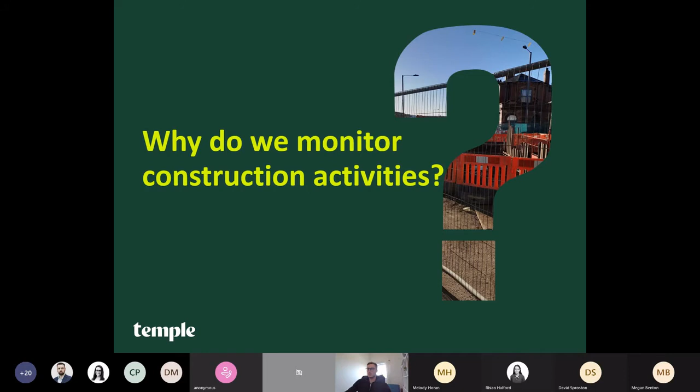So we can just flick to the next slide please. So, question: why do we monitor construction activities? Okay, so these are the topics for discussion today. I think this slide gives you a bit of a clue to the answer to that question. We're going to run through these key topics in the next 10 minutes or so, and hopefully by the end of the slides we'll be able to summarise the value and importance of environmental monitoring.

Okay, so the first key point I want to address is legislation. Environmental monitoring is often a legal obligation. That may be, for example, under an overarching legislation, such as the Control of Pollution Act, which requires us to manage noise effectively on construction projects. This act usually dictates the use of best practice, which is often in the field of noise controlled through a Section 61 consent. So environmental monitoring ensures compliance with such legislation and the regulations and permits which may sit underneath this.

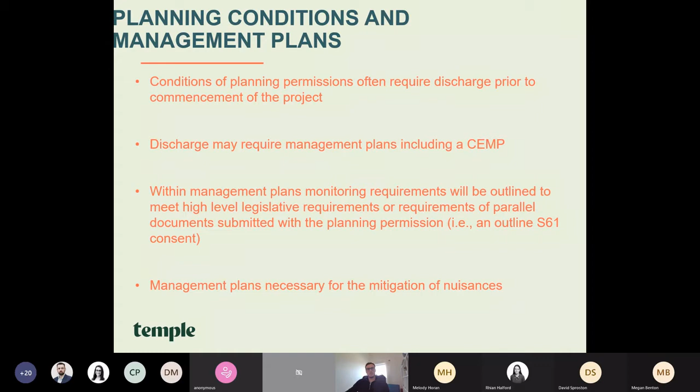But if a pollution incident does occur, the Environment Agency may fine an individual or a company. Now, these fines reflect the seriousness of the offence and the financial circumstances of the offender. So there's no blanket fine for, say, a set offence. As stated, it's linked to company turnover, harm, or culpability. Now, these fines can vary from hundreds of pounds to hundreds of thousands of pounds fines in very extreme cases.

So just to run through a couple of examples with you on the financial implications that may come from enforcement action. A company was recently fined £6,000 and ordered to pay over £4,000 in legal costs, after pleading guilty to breaching environmental permitting regulations. In this instance, that was for causing trade effluent to enter freshwaters without being authorised by the environmental permit that's required.

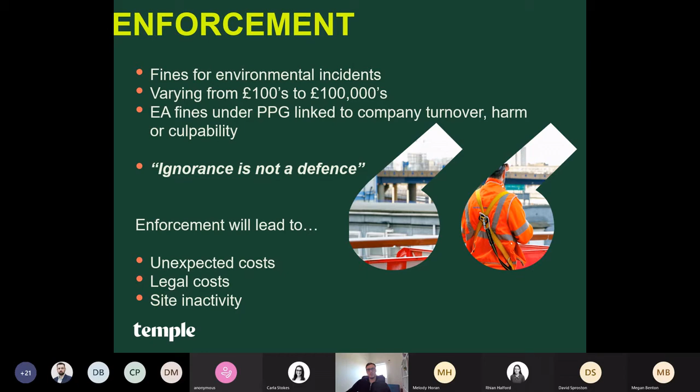An example of an indirect financial penalty linked to site inactivity is a road project in central London several years ago. They continually breached their Section 61 consent under the Control of Pollution Act, which relates to controls on noise and vibration. The council provided warning letters that weren't abided by, and subsequently placed a Section 60 notice on the project. This limited the working hours from 8 hours a day to just 45 minutes per day for the piling activity responsible for those noise breaches. Clearly, this has a significant impact on programme and subsequently costs. So environmental monitoring is a vital part of avoiding that enforcement action.

Aside from simply avoiding enforcement action, environmental monitoring may be required under certain contractual agreements with a client due to, for example, stakeholder agreements or client minimum environmental standards in line with an accreditation such as ISO. For example, ISO 14001 requires evidence of continual improvement, for which environmental monitoring provides that data set and evidence. Sometimes a client in an urban environment may also require monitoring of activities due to the sensitivity and proximity of nearby receptors, in order to manage the risk of nuisance, potential complaints, and reputational damage which may subsequently follow.

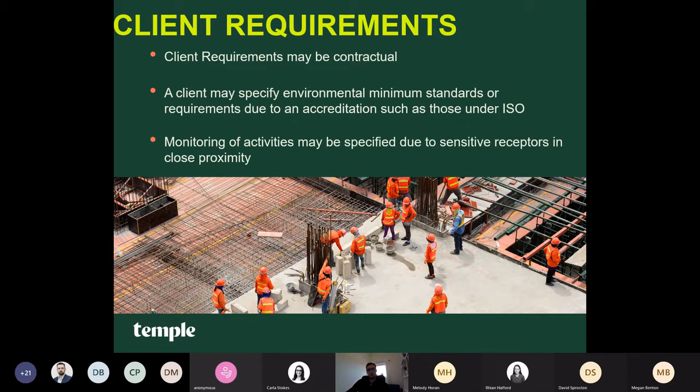As we've just alluded to, environmental monitoring may be required to manage nuisance associated with construction if receptors are in close proximity or a sensitive location, for example, downwind of the site. As you're aware, plant on construction sites can cause health issues to those nearby, be that through noise or air pollution, if steps are not taken to mitigate the risks. Environmental monitoring allows us to predict through the collection of data where issues are arising, and allows us to put in place mitigation measures to protect the community before the issues get out of hand.

A good example of this would be a particularly dusty activity, such as a certain material being cut, taking place outside in the open on site. Without environmental monitoring, the activity may continue for several days, weeks, or even months, allowing complaints to build up and potentially, as a worst case scenario, long-term health issues for sensitive local receptors. However, with environmental monitoring, a real-time alert goes off as soon as the activity breaches the trigger level, and the activity can be instantly shut down whilst a mitigation measure, for example, something as simple as moving that activity indoors, can be established. So, due to early warning, this would mean no complaints and no harm to local receptors.

Another point to make is that environmental monitoring allows a method to manage complaints. With that background data we can collate, we can easily establish if a complaint is accurate or technically justified, and this is a useful tool to take to stakeholder forums.

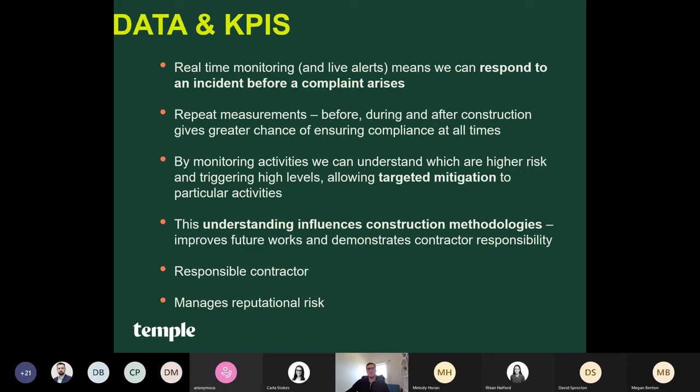However, it's not just about managing reputational risk. Environmental monitoring can also be seen as an opportunity. Environmental monitoring, demonstrating that environmental stewardship, can actually boost future opportunities and tender bids. This can especially be the case if the contractor uses examples of going above and beyond to attain environmental awards, and in order to do that, monitoring data will be crucial in providing evidence. An example will be the Green Apple International Awards, which aim to encourage the efficient use of resources, enhance the competitiveness of organisations, and support the wider goals of sustainable development.

So to spin back to the original question, why do we monitor construction activities? I think this slide summarises 4 key points. Monitoring aids in remaining compliant with control measures required to carry out the project, managing and mitigating against potential nuisances, pushing continual improvement with those repeat measurements over time and that bank of data we can collate, and ultimately demonstrating environmental stewardship.

I think most importantly, environmental monitoring allows construction sites to help maintain good relationships with their neighbours, which ultimately benefits contractors in their aim of being awarded future works.

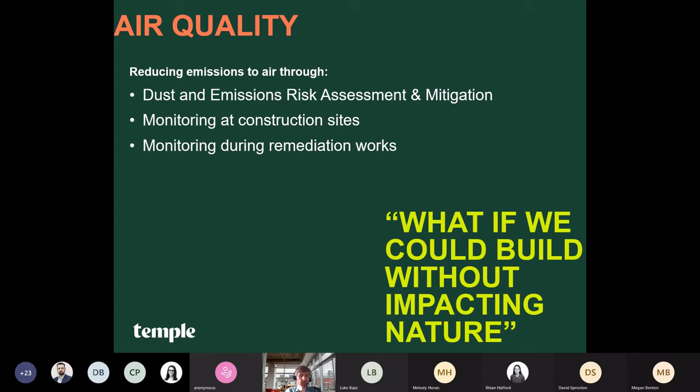Next slide, please. So the requirement for mitigation and monitoring at construction sites is often determined within an air quality assessment that might be submitted with a planning application, or in order to discharge a planning condition, you might have to produce something like a dust and air quality management plan or relevant sections of a CEMP, which Luke was referring to.

So air quality assessments or a dust and air quality management plan will typically include a dust risk assessment, with the risk category used to determine proportionate mitigation measures and then inform the monitoring strategy.

While the Mayor of London has published guidance applicable to the Greater London area in 2014, most other local authorities across the country haven't adopted their own guidance, and so dust assessments, mitigation measures and monitoring requirements are typically recommended in accordance with equivalent guidance documents issued by the Institute of Air Quality Management.

The guidance recommends a suite of mitigation measures, and these can cover things from covering and seeding stockpiles to stop dust being generated in the first place, through to steps which management should take to enforce mitigation measures, but I haven't gone into too much detail about this in this presentation.

It should be noted that monitoring is typically required to monitor emissions from general construction activities, but mitigation of emissions from plant and vehicles can also be recommended.

So, for example, in London, and other local authority areas, including Warwick, you might have to implement requirements on non-road mobile machinery to make sure that they meet prevailing legislation on emission standards, and these can vary in London in different sorts of places.

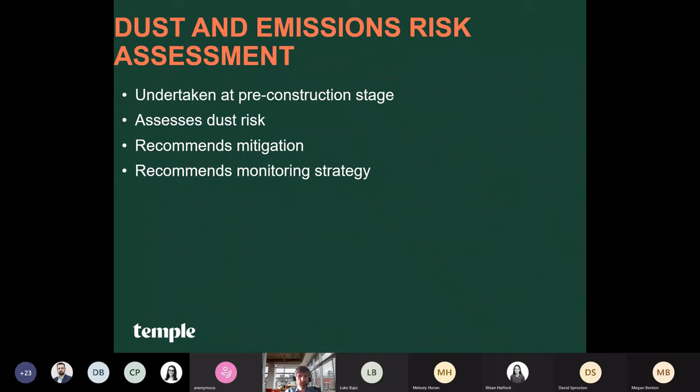Next slide, please. So monitoring should be undertaken to confirm measures to control dust and particulate matter, or PM10, generated at construction sites is sufficient, and shouldn't be used to replace mitigation measures.

The consensus for a low-risk site following assessment in the IAQM guidance is that visual inspections are sufficient, but continuous monitoring, whether using reference or indicative measures, is recommended in guidance at medium and high-risk sites in London, and at least high-risk sites in assessments where the IAQM guidance applied.

The London guidance recommends that monitors should be located either along transects, so that you can compare upwind and downwind concentrations, or near sensitive receptors such as local residences. Ideally, these would be relocated as work progresses, for example between different phases of a development as it progresses.

So while reference method monitors are available to give precise measured pollutant concentrations, a new monitor can cost upwards of £10,000, and the main purpose of monitoring at a construction site is often to identify when dust from site activities or stockpiles is causing an impact above the baseline, so that you know you then need mitigation.

So indicative instruments often have acceptable precision to show the trends in PM10 concentrations over time, and therefore they're suitable for this sort of purpose.

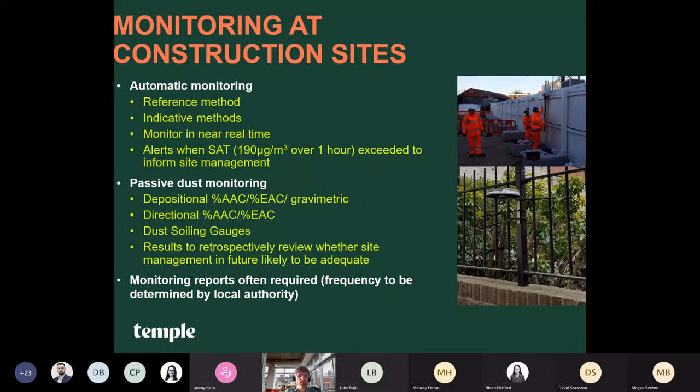At some sites, such as a house builder's residential site we're currently working on in Plumstead, you might want to monitor for contaminants that might be exposed in contaminated soil as earthworks commence. Where a site is found to be contaminated, a geoenvironmental consultant will often prepare a remediation method statement, which might recommend precautionary air quality monitoring at the site boundary. This will either be where there's potential for volatile organic compounds to be generated, such as benzene, toluene, ethylbenzene and xylenes, which can impact human health if inhaled, or alternatively certain compounds that volatilize or are mobilized as earthworks commence.

At the site in Plumstead, we've been undertaking VOC monitoring at the site boundary and at off-site locations using Tenax tubes. It's important to arrange for speciated lab analysis because some VOCs have lower thresholds for detection and impacts on human health than others. They're quite easy to install, simply fastened with a clip to a lamp post and left in situ for a 2 to 4 week period, then you come and change them regularly and submit them for lab analysis. They're relatively cost effective for this purpose.

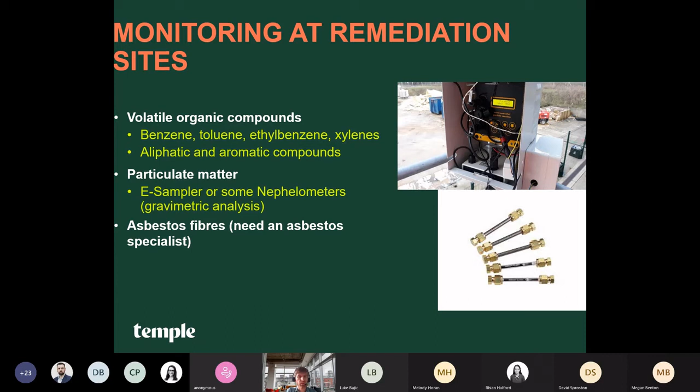Hello, everyone. I'm Richard Evans, a consultant in Temple's Noise and Vibration, or Acoustics, team. I'm going to cover some of the practical on-site elements of monitoring that we've just talked about. I specifically work on noise and vibration monitoring, but because we offer noise, vibration, and air quality monitoring, we often do the work in tandem, so I'm covering both of those angles here.

We've worked on a number of projects of different scales, and a lot of this work is scalable to different sizes. We generally recommend, particularly for noise and vibration, remote long-term monitoring, because it means you've got 24/7 data on the site. We can set trigger levels to alert when limits are about to be exceeded or have been exceeded, and we can also report data. We have a lot of data that can be analysed if needed.

In terms of the scale of monitoring, we can cover anything from a small site. For example, a small construction site, like a current example we have at the moment, has one noise monitor, one vibration monitor, and one or two air quality monitors on the site. We've also worked with larger sites where they can have up to three or four of each noise and air quality monitor around the site.

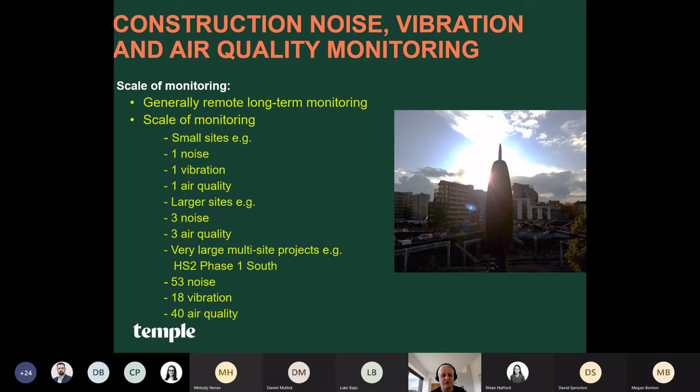We've also worked on some very large infrastructure projects, for example HS2, where on that particular project we had 53 noise monitors, 18 vibration, and 40 or more air quality monitors at any one time, which enabled a lot of data capture. They were all based on specific sensitive receptors, but that gives you an idea of the scale that is possible with the remote monitoring technology.

As Daniel mentioned, with noise and air quality there are various ways of installing the monitors. This is an example from the large project I mentioned, where we used a lot of public lighting columns, lampposts. You can see in those two photos we've got an air quality monitor and a noise monitor sharing the same power supply, sharing the same lamppost, and they were both serving the same sensitive receptors.

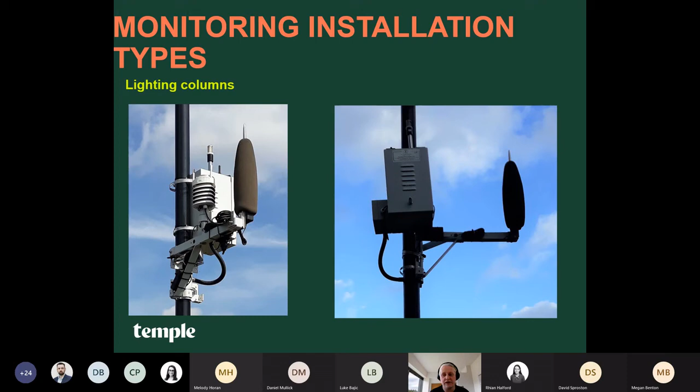As another example, you can monitor at the sensitive receptor itself, as we're doing here on these rooftops, where we're just using the railings of the rooftops to attach the air quality and the noise monitors. That gives you the benefit that you've got monitoring directly at the sensitive receptor itself.

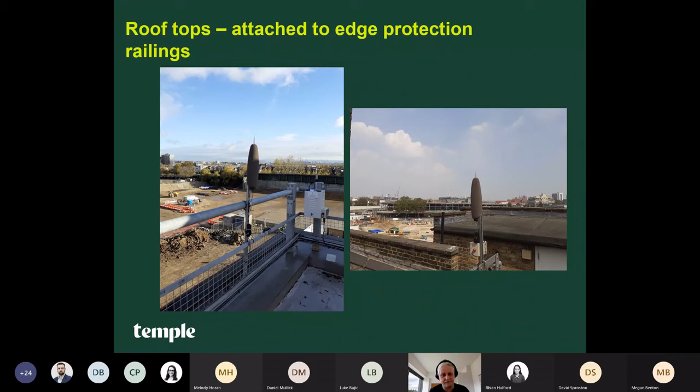What we also typically do in construction monitoring is actually monitor at the site boundary. These are two examples of monitors attached to the site hoarding. In the left picture you can see an air quality monitor and a noise monitor with a weather station attached, installed on the site hoarding next to each other, and the same in the picture on the right, installed on the same hoarding.

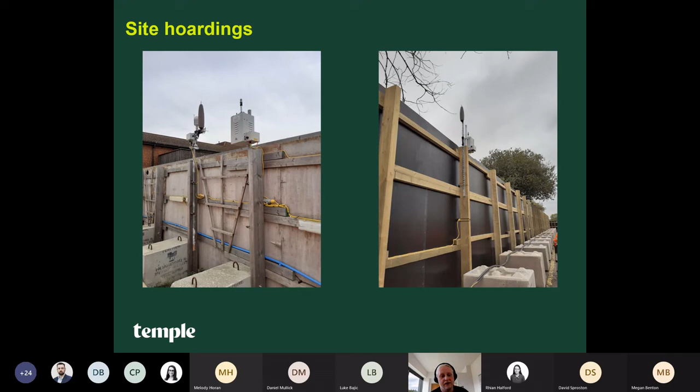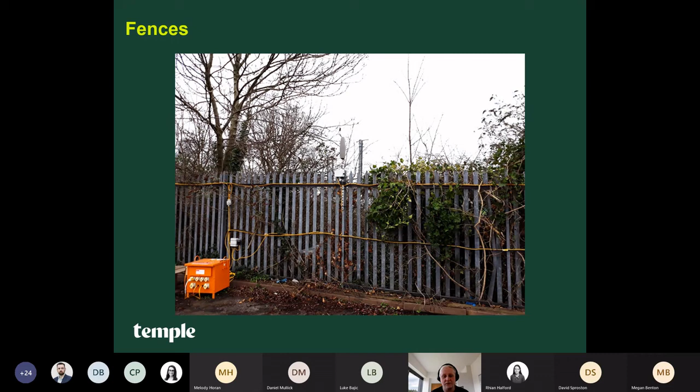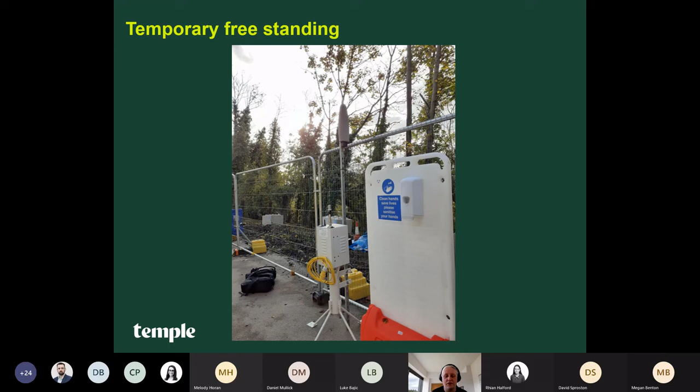There's another example here where a site didn't have a proper hoarding at the time because the work was very dynamic. I believe this was on HS2, and because the project was in a transition stage, moving between different phases, the site didn't actually have a hoarding at that point. So we installed a very temporary installation like this to get some data for the site coming in until they had a position where we could properly install monitors.

So that moves us on to vibration monitoring. All the monitors we were looking at before were shared noise and air quality locations, and this is just some examples of where we would monitor vibration.

Vibration can be quite challenging because if you monitor vibration on a construction site, you're very often constrained for space, and the sensors are extremely sensitive, need to be placed on hard ground, and that means they need their own exclusion zone around them. You can't place them near any vehicle routes or walking routes, or the data's not really very useful to the site.

So very often what is done is that we monitor at the sensitive receptor itself, and that means finding a space in a building that's secure, that you can put the monitor into and lock it away, and also that it's not going to be disturbed by footfall or vehicle movement or any other kind of movement.

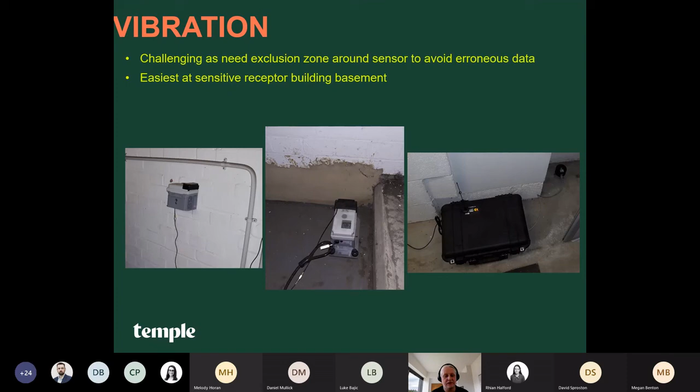Daniel mentioned a little bit about this, so I'll just elaborate a bit on power. Of course the monitors all need some kind of power, apart from the passive methods that Daniel mentioned. We would generally recommend some kind of mains power.

It is possible to use solar panels and batteries, but I know some monitors are more power hungry than others, and it can prove challenging with some of the more power hungry ones. We have successfully used solar panels for certain types of noise monitors. You can run off batteries as well, but the downside of that is that it requires more frequent site visits to replace the batteries.

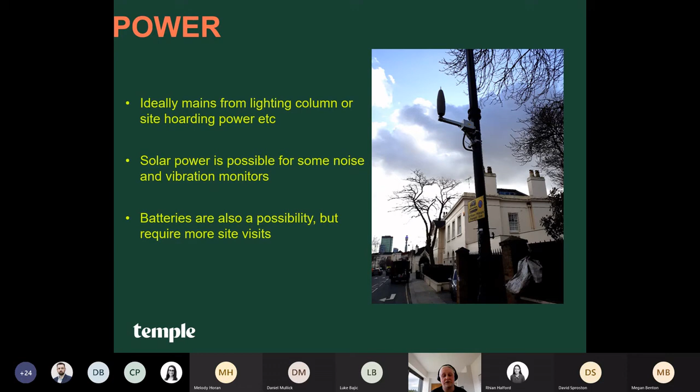If we could have the next slide, please. That leads on to maintenance access. As Daniel mentioned in his slides, all types of monitor need regular access for maintenance to fix any issues, but also for calibration and quality assurance purposes.

Generally, noise monitors need access every 3 months to calibrate the monitors. I know a lot of the air quality monitors will need 3-monthly access as well. And then monitors also need sending off to a laboratory on regular intervals, either every year or every 2 years.

So that's always something that we recommend factoring into a monitoring project, is that the ongoing access will be needed, but also monitors have to be swapped over, and very often a replacement monitor will be needed just for the period when the active monitor is being sent off to a laboratory.

That leads on to forward planning. It's very useful if at the outset of a monitoring project you can forward plan, and if we can get an idea of what the phases of the development are, where monitoring is going to be needed, and how that is going to shift.

If the site boundary is going to change, if the receptors affected are going to change, and if that monitoring is going to need to move around the site, it's very useful to be able to plan that in advance, because that can mean that monitors need relocating, or you will need more monitors at some point in the project.

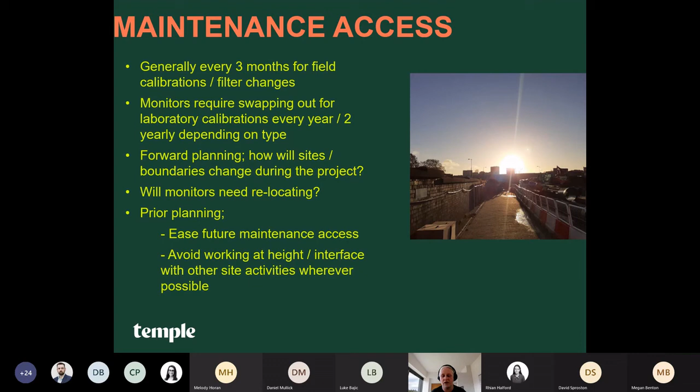What we usually do is we try and install monitors ideally so that we avoid working at height or interface with other works on a construction site wherever possible. If I can have the next slide, please.

Finally, just part of that planning point is when it comes to carrying out the monitoring, it's good to make sure that site teams are briefed and on board with why the monitoring is taking place, and why ongoing access is needed, and why it's important that the monitoring is done effectively. In other words, that we minimize power outages, that we maximize the uptime of the monitors and the percentage of data capture that we get from them, because that's essential.

Tying into what Luke said about ignorance is not an excuse - basically, you need the data there to cover your activities. As part of that, it's good for us carrying out the monitoring to have an active list of contacts at the site that we can get in touch with if there are any problems.